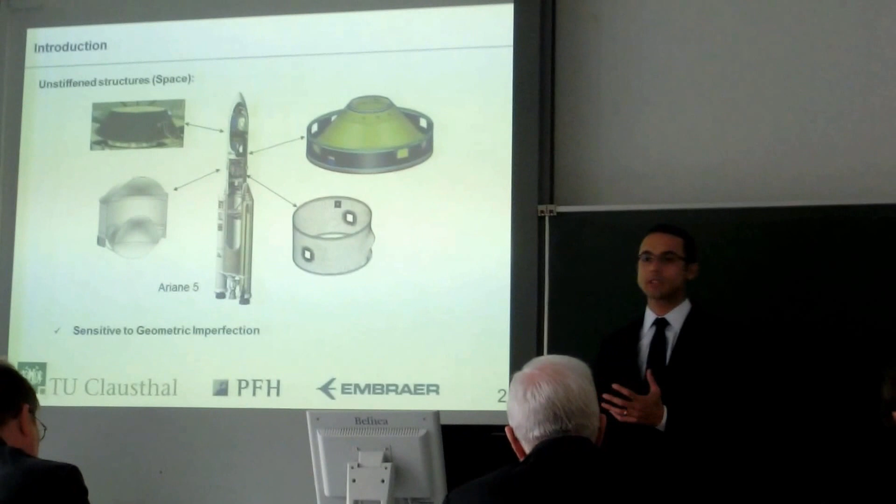These shells have in common one aspect: they are very imperfection sensitive, which means for a small geometric imperfection, the buckling load or the load carrying capacity will be drastically changed. So you have a huge reduction of the load carrying capacity for any small geometric imperfection. When developing models for this type of shell, these models should be able to capture this imperfection sensitivity. So the main focus when developing a semi-analytical model for this type of shell is to be able to capture this imperfection sensitivity.

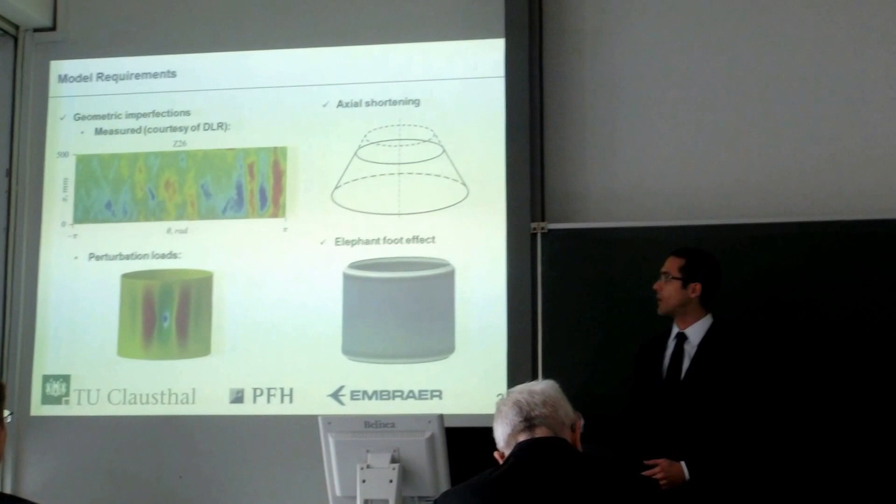This takes us to the model requirements. So what should we be able to consider? First, I already mentioned the geometric imperfections, and here we have an example of a measured geometric pattern given as a courtesy by DLR.

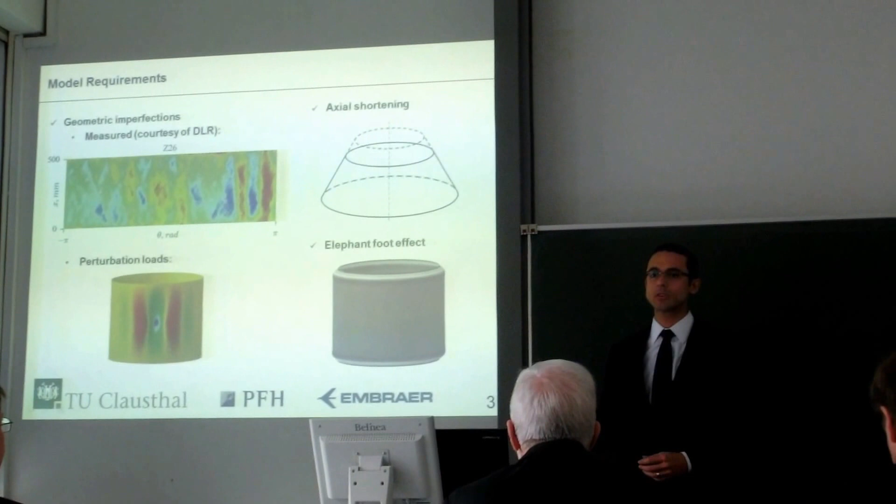Another typical geometric imperfection that we are currently investigating is the one induced by a perturbation load. So we apply a perturbation load, there will be a geometric imperfection pattern, and this also causes a reduction of the load carrying capacity of this structure.

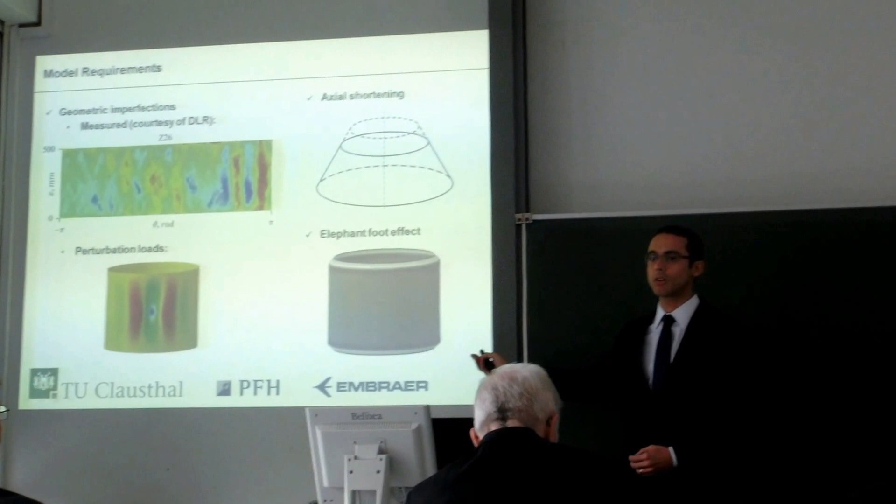Since most of our activities are related to cross-validation of test results, we must be able to take into account the axial shortening that we verify in our testing conditions as well. Another phenomenon that we must be able to capture in these semi-analytical models is the so-called elephant foot effect, which carries this name because of the pattern that we see here.

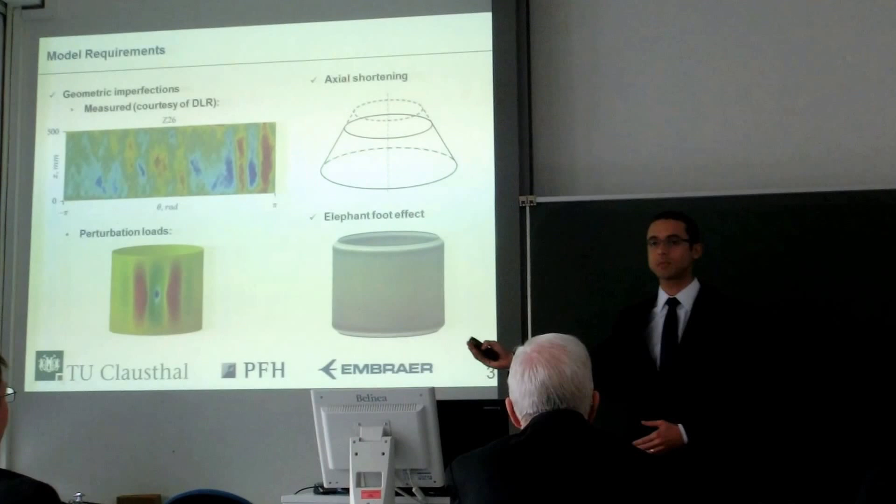This pattern happens because when we apply the axial compression, there will be a radial expansion of the shell, and with the edges constrained for normal displacement, we have a high strain concentration close to the edges, and this becomes an important failure mode that the models must be able to capture. Not only in the space industry, but also this is very much investigated in the civil engineering field.

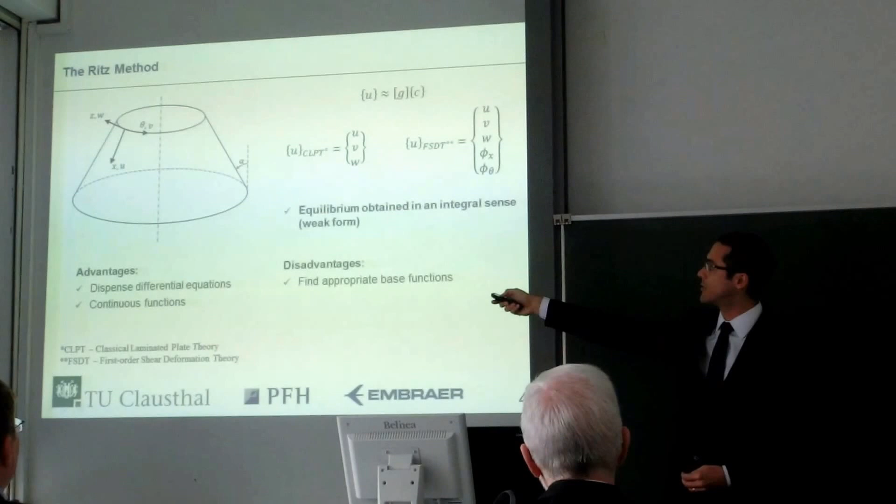One is for the x-axis, we call u. The second one is for the circumferential axis, we call v. And the third one is for the normal axis, we call z. The displacement field variable is w.

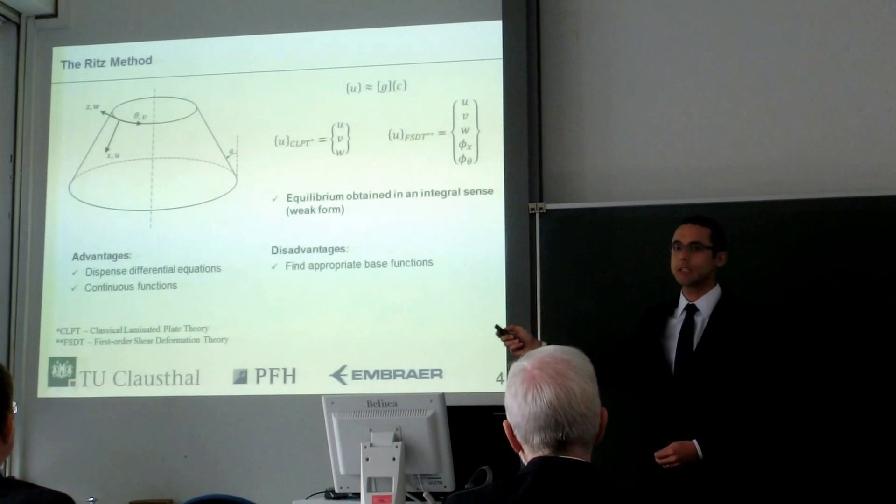When we use the classical laminated plate theory, we can build our displacement field vector as shown here, using the three translational displacement field variables. And when we use the first order shear deformation theory, we have the two rotations of the shell treated as independent variables, so we have two additional independent field variables here.

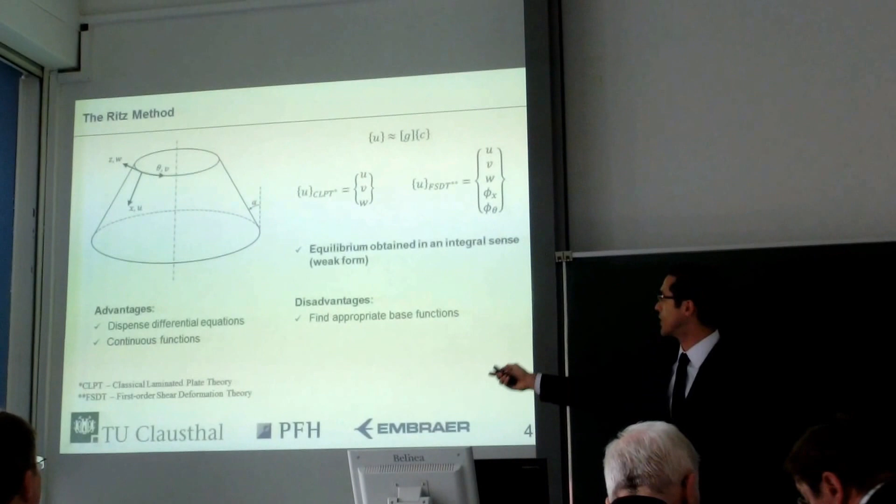When we use the Ritz method, we work directly with the energy functionals, and therefore we obtain the equilibrium equations in an integral form, also usually called the weak form. This means the equilibrium is not achieved at every point in our domain, but in a global sense we guarantee the equilibrium.

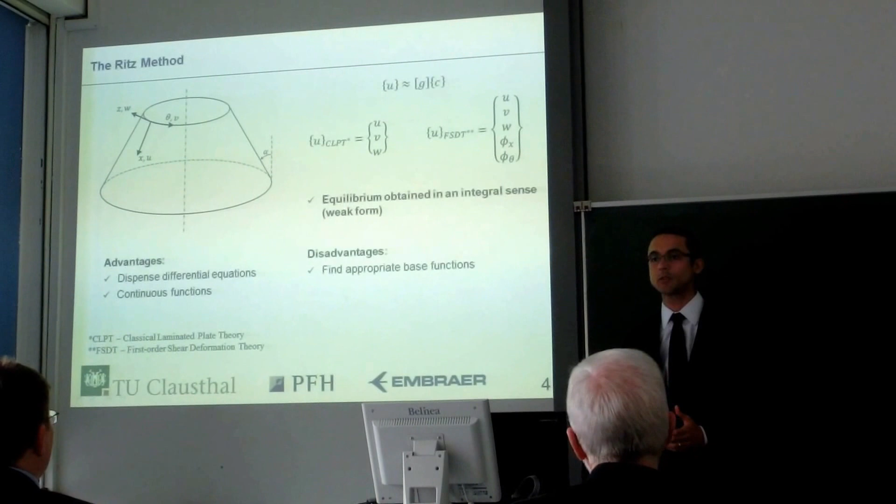Some advantages of the Ritz method. The main advantage, I would say, is that it dispenses with the use of differential equations, so we don't have to work with the governing equations of the system. You can work directly with the energy functionals.

A second advantage is that we obtain at the end a continuous function describing not only the displacement field but also the strain and stress fields all over the domain, and it's very straightforward to obtain strain, stress, and displacement outputs all over the domain.

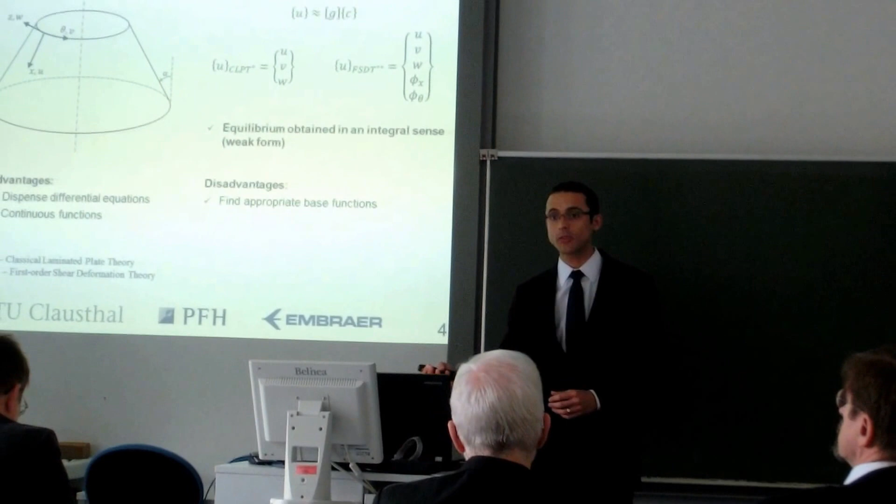But at the same time, having a continuous function, which is one advantage, may become a big disadvantage of the method, because finding the appropriate set of base functions to describe the displacement field all over the domain can be very hard, depending on your boundary conditions and your load cases.

This is what I'm going to detail now: how I decided to separate and find the right set of approximation functions for our problem.

Again, we can approximate the displacement field vector by a matrix containing the base functions, so we know the possible shapes that our displacement may have, but we don't know the amplitudes of these functions building up the full function.

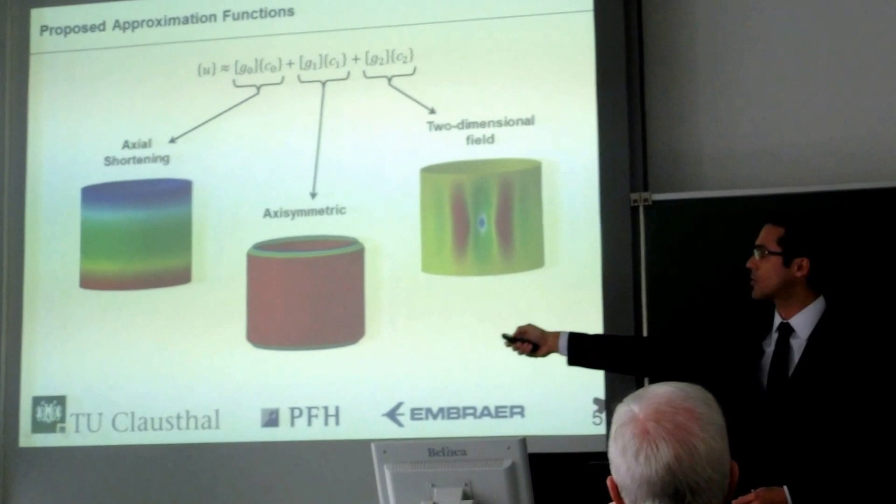I propose to separate the full approximation functions into three parts. The first part was designed to capture the axial shortening of the shell. The second part was designed to capture the axisymmetric component of the displacement field. And the third part was designed to capture the two-dimensional components of the displacement field.

Now I'm going to detail each one of these. The first part is designed to capture the axial shortening.

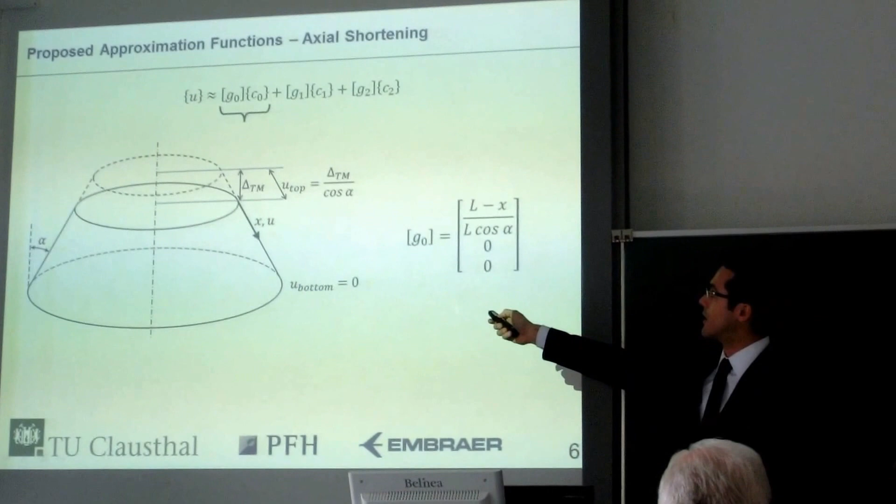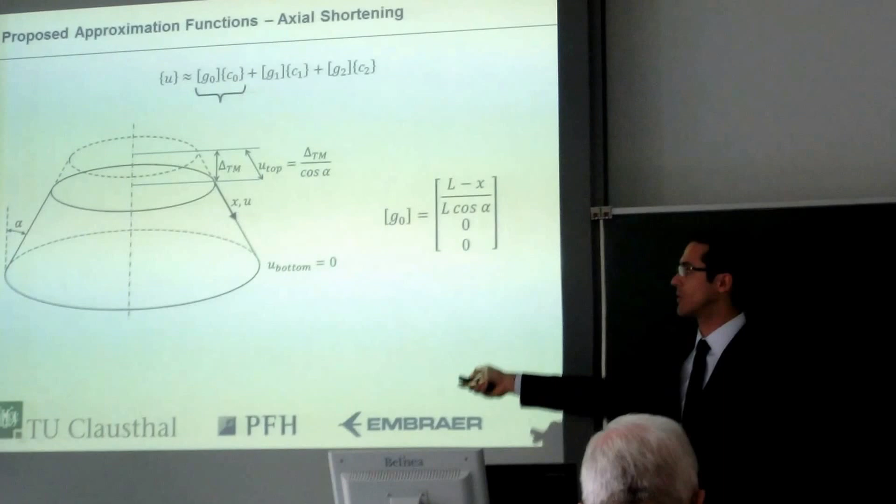When we have the displacement of the testing machine, called delta Tm, we have the displacement of the top edge along the meridional direction described by delta Tm divided by the cosine of the conical semi-vertex angle. At the same time, we have a null displacement at the bottom edge.

I found that using a linear shape function for capturing this axial shortening was already enough, and it gives the same result as a finite element model, as we are going to see in the next slide.

Here is how we build our shape functions for the first part of the approximation field. The first row corresponds to the meridional displacement u, the second row to the circumferential displacement v, and the third row to the normal displacement w.

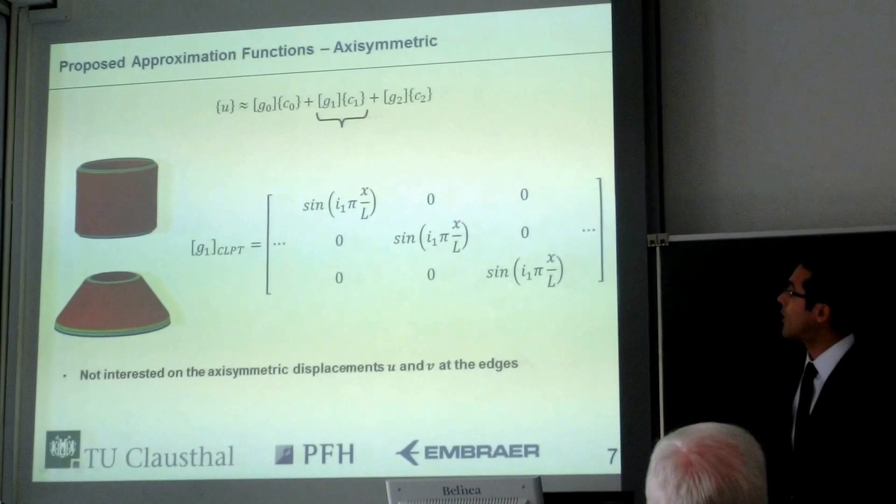Now, moving to the axisymmetric component of the displacement field, it is shown here with one example for a cylindrical shell and another example for a conical shell.

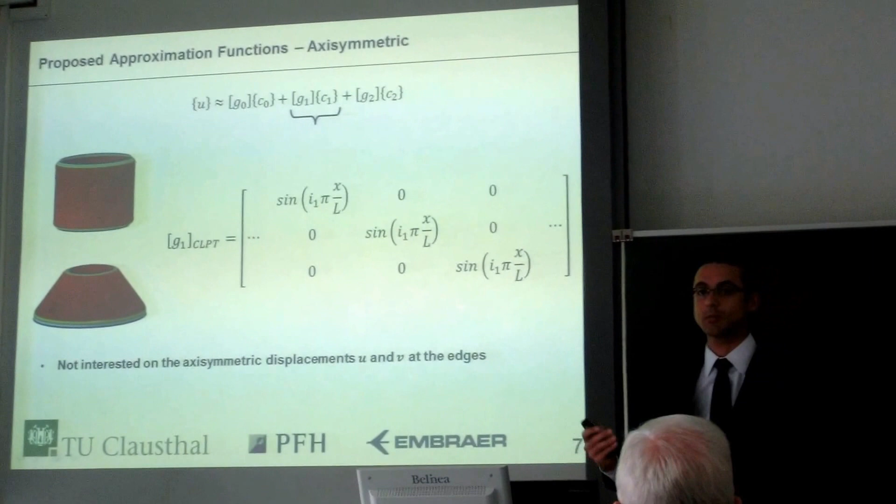I decided to use sine functions to capture this axisymmetric component separately from the two-dimensional component, because sine functions will always give zero displacement at both edges, and I'm not willing to capture any axisymmetric displacement component at the edges. Therefore we can use the sine function, and it's computationally cheap to separate the axisymmetric component from the two-dimensional component.

Now, the last component of our approximation functions can be written in matrix form as shown here. Let's take the third row, which corresponds to the normal displacement, and evaluate this component. We have two components for the normal displacement.

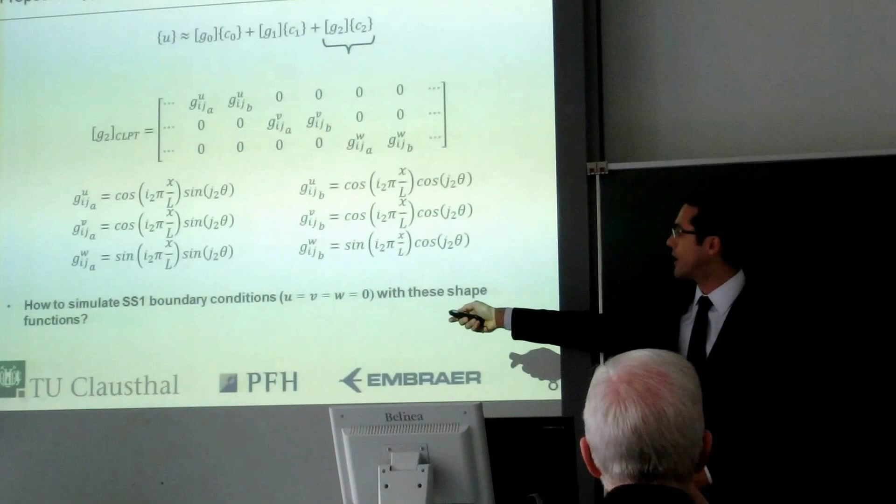The difference between the first and second is that in the first we have a sine function for the circumferential coordinate theta, and in the second we have a cosine function for theta. In this way, we obtain a full Fourier series for the circumferential coordinate, and therefore we are able to capture any displacement pattern that depends on the circumferential coordinate.

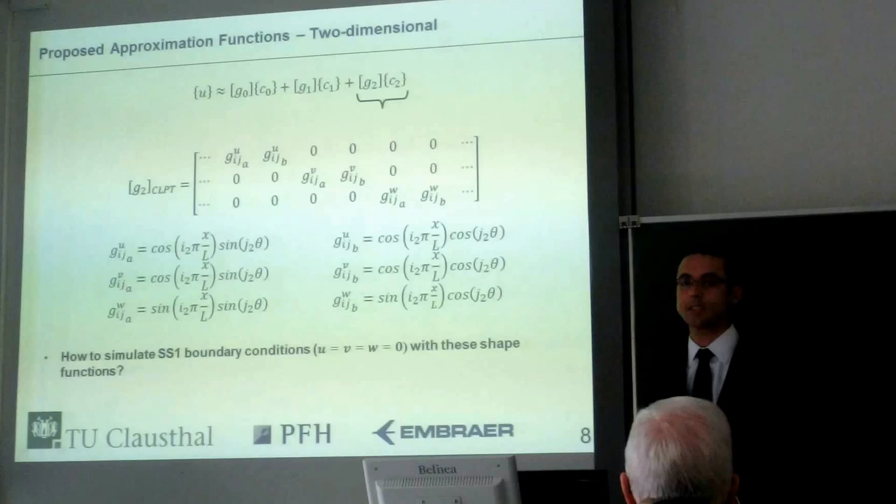On the other hand, for the meridional coordinate x, I only use a sine function because I'm assuming the normal displacement at both edges will be zero, since this condition is very similar to our testing conditions.

For u and v, I'm using cosine functions instead of sine functions to capture the displacement along the meridional coordinate, which means I'm not guaranteeing zero meridional and circumferential displacement at the edges.

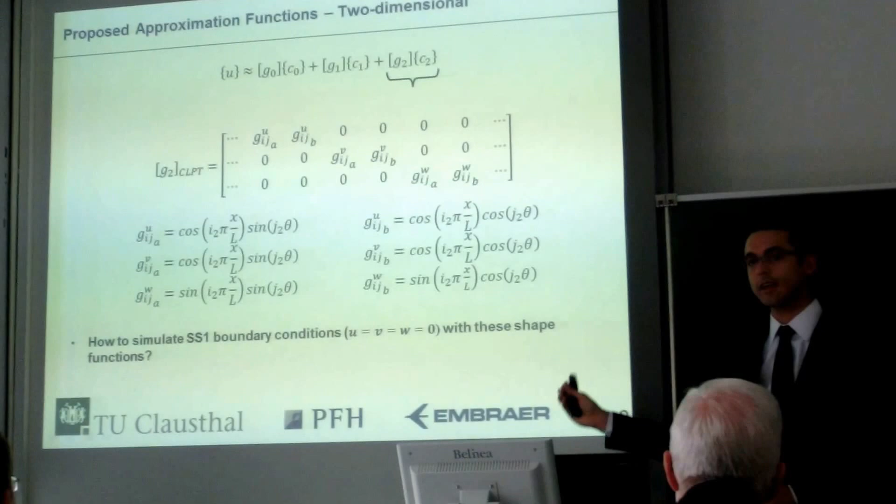So in this way, I'm proposing to use these functions, but how can I use them and at the same time achieve one of the typical boundary conditions—the first type of simply supported condition, where u, v, and w are all zero at the edges? How can I use a cosine function if I want to capture u, v, and w being zero at the edges?

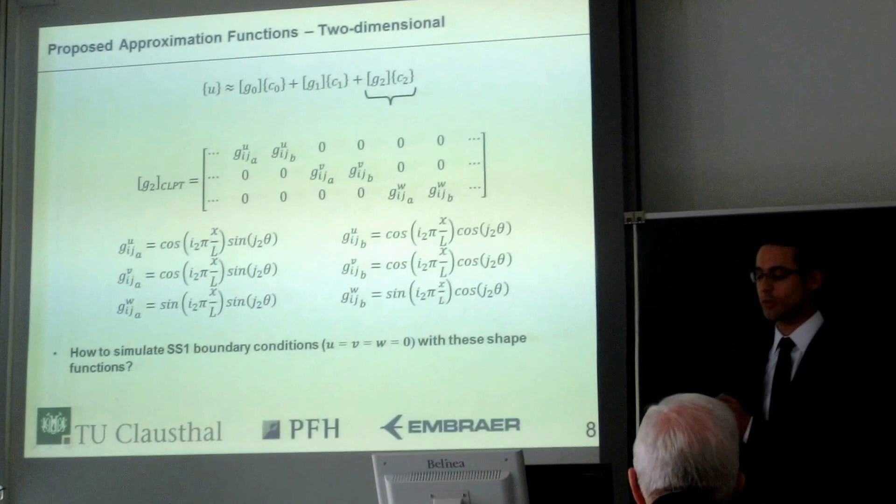So there is a way we found to do it, using elastic constraints to penalize the stiffness matrix in such a way that we change the stiffness of the system just at the edges. This is illustrated here.

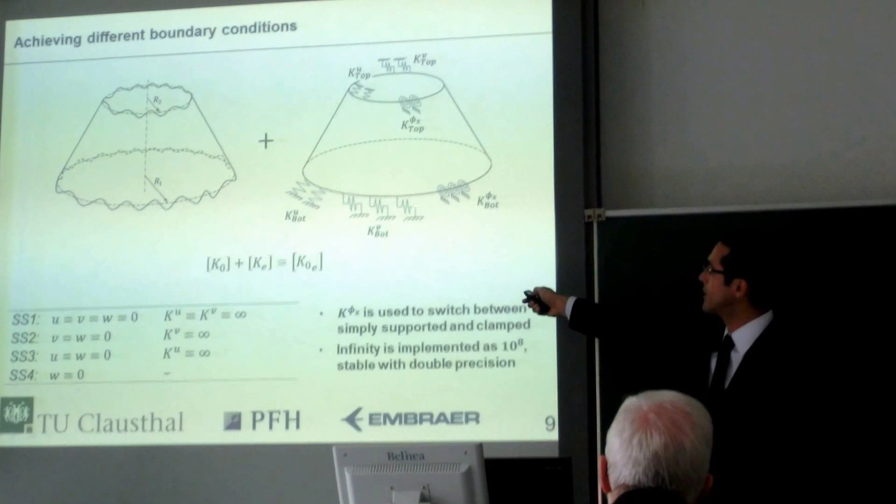Without the distributed constraints, the distributed springs, we would obtain a displacement pattern like this. But if we want to guarantee simple support where displacements at the edges are 0, we can add elastic constraints, represented in matrix form as shown here. So we change the linear stiffness matrix of the system, and in linear static, non-linear static, and linear buckling analysis, we can use this modified linear stiffness matrix.

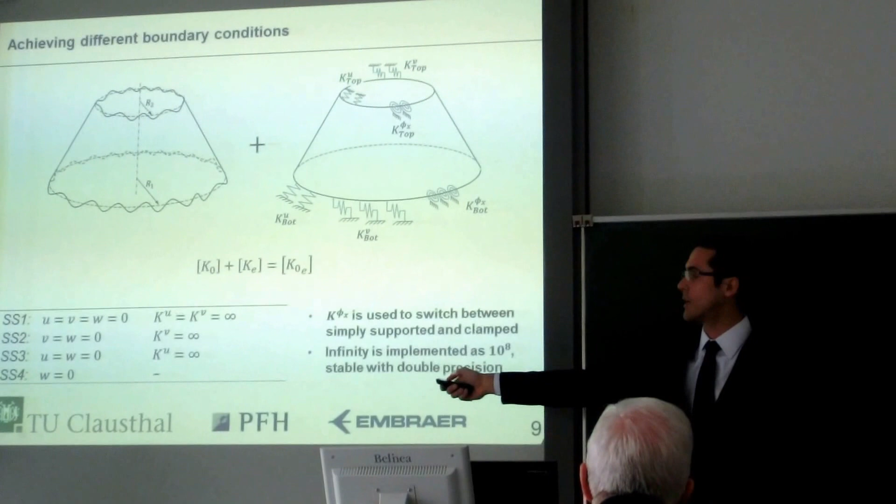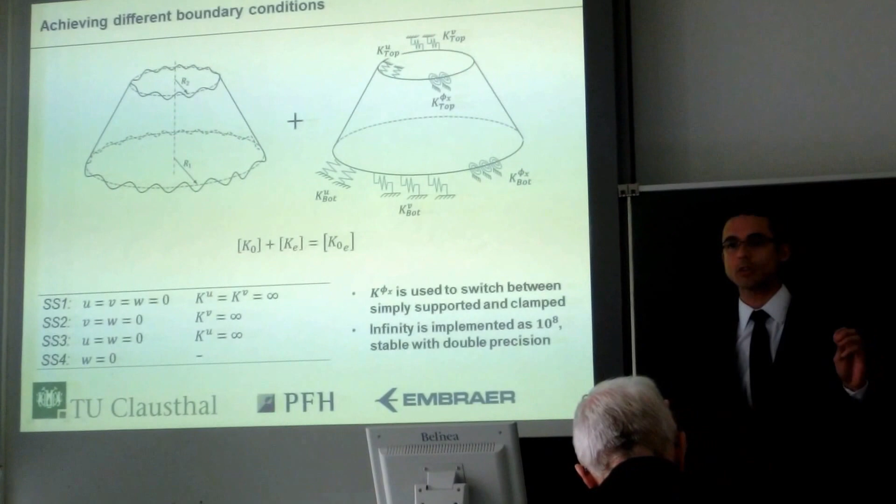Let's give one example. To achieve the first type of simple supported boundary conditions, where the 3 translational displacements are 0, we can set the stiffnesses Ku and Kv to infinity, and this gives the right behavior. If instead of simple supported we wanted clamped or fixed boundary conditions, we should work with the rotational stiffness at the edges. So we can switch between simple supported and clamped boundary conditions by changing the rotational stiffness of the system.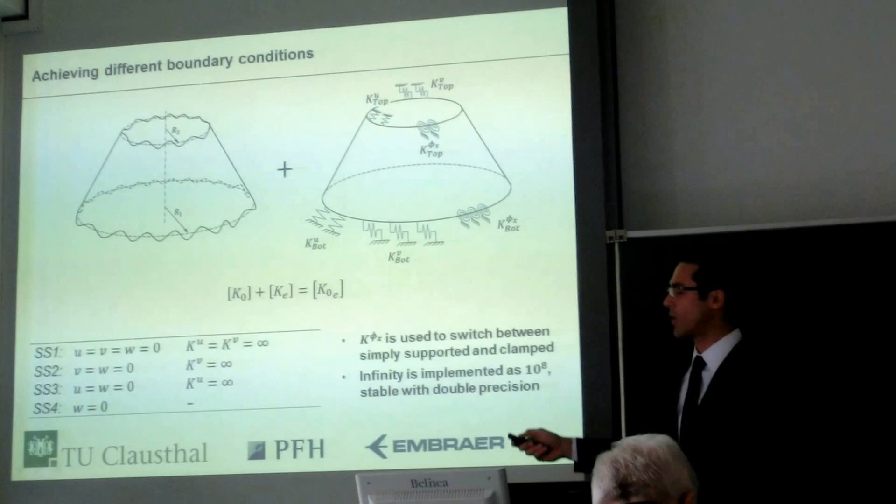In practice, we never use an infinity value; instead we use a numerical value high enough to produce rigid behavior, but not too high to cause numerical instability. In one of our publications, I found that using 10 to the power of 5 Newton per millimeter already produced rigid behavior, though I'm using 10 to the power of 8 in the full implementation with double precision in the code. This showed to be numerically stable and much higher than necessary to produce rigid behavior.

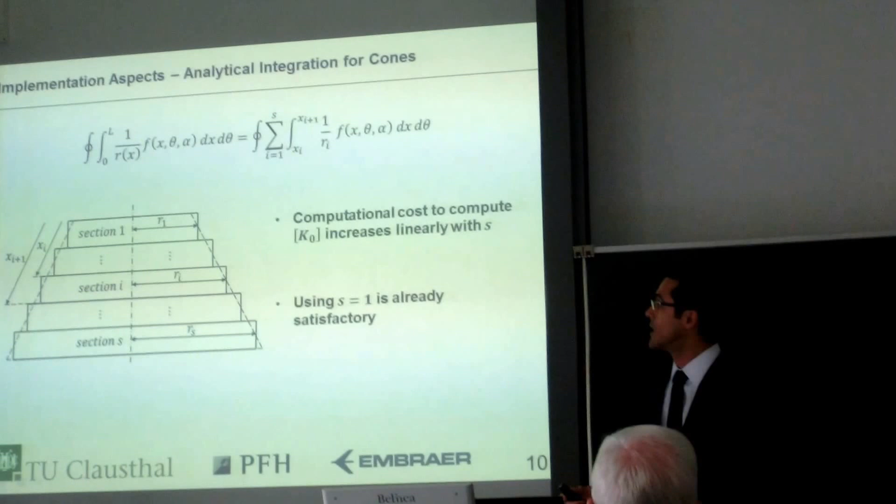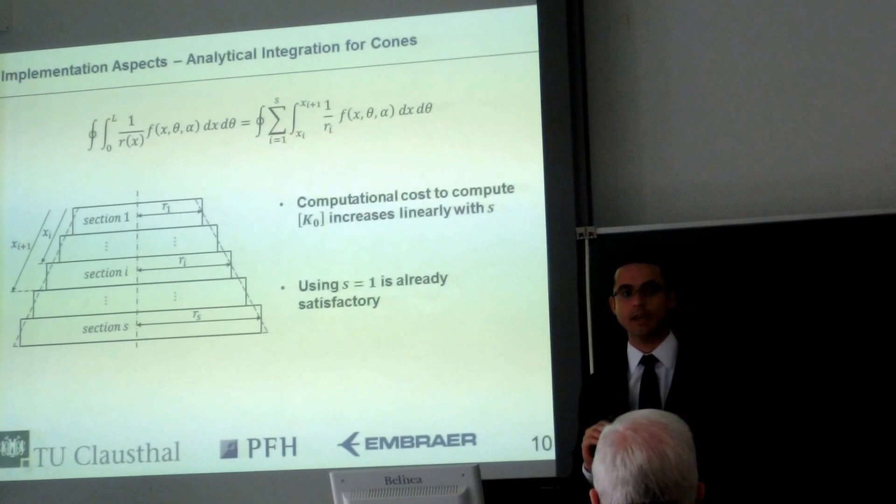Another important implementation aspect was how to integrate the linear stiffness matrices for the conical shells, because conical shells have the radius depending on the meridional coordinate x. Because of this dependency, we run into expressions that are not integrable analytically, so we have to find a way to approximate this.

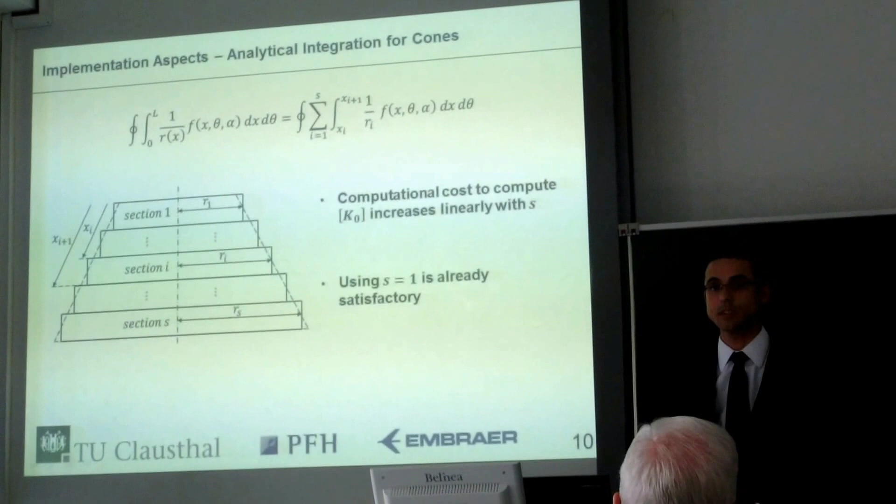One way that showed to be computationally efficient was to divide the integration domain as shown mathematically here, and as illustrated here, where we have different integration sections, each using a constant radius taken from the middle of that section. This way, the computational cost to integrate the linear stiffness matrices for conical shells depends linearly on the number of sections used.

It was interesting that for shells with constant stiffness properties over the domain, we can use only one term, giving a result within an error of 2 to 3%, which is very suitable for optimization tests. So if we need a very quick cycle for the analysis, we can use only one section and the results will be within a reasonable tolerance.

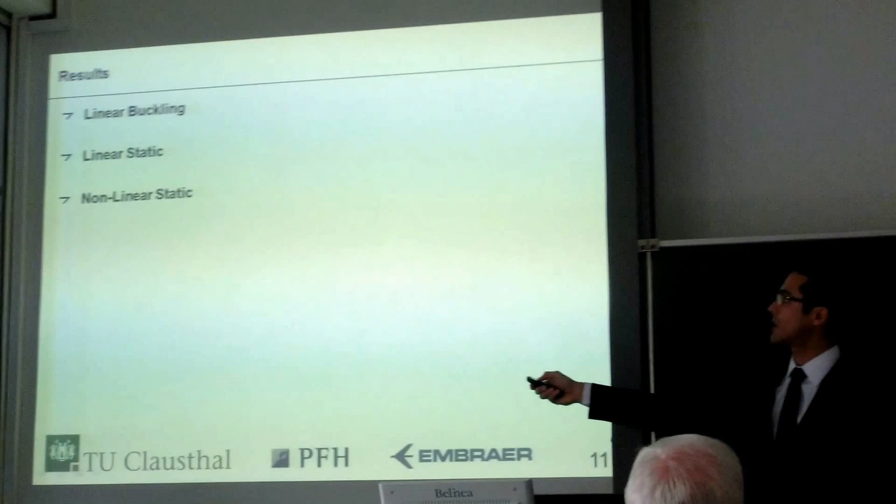And talking about the results, we can already show some of the results for linear buckling, for linear static, and also for nonlinear static analysis.

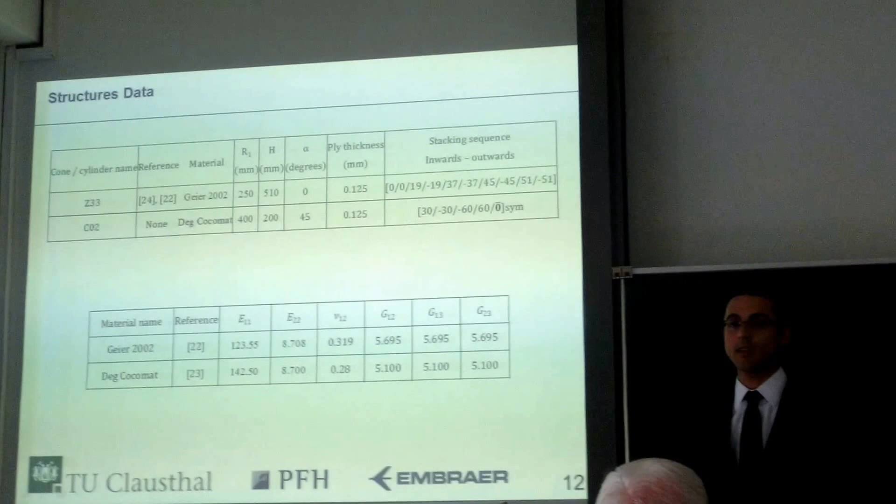Here I'm showing some of the structures that I'm going to discuss. Basically, we have a cylindrical shell which was designed at DLR in 1992 by Dr. Zimmermann. This structure has a special characteristic: a very special laminate, as you see here, designed to generate the highest imperfection sensitivity. This structure has become a benchmark case for testing many different methods, not only by me, but by many authors.

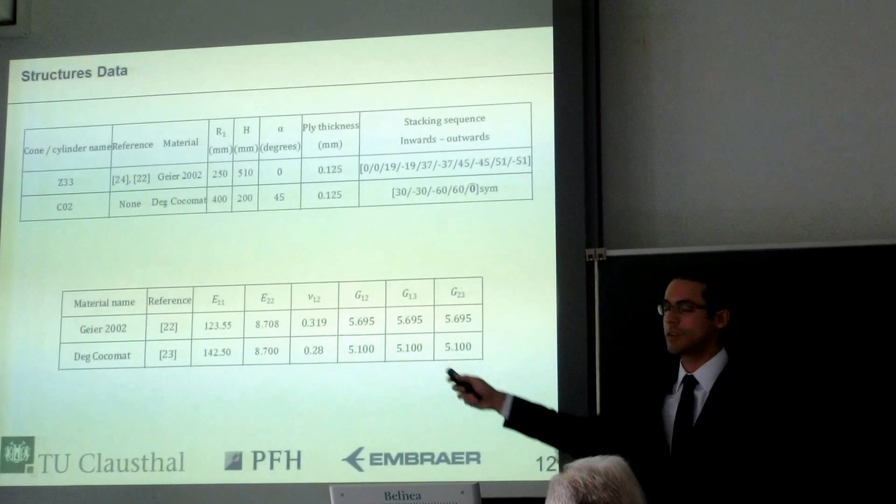I also designed another conical shell, having high imperfection sensitivity, not using an advanced procedure as used by Zimmermann, but just to get high imperfection sensitivity in order to verify the algorithm. The material properties are shown here, and correspond to a usual ply with unidirectional fibers.

In many of our results, you won't see the three-dimensional patterns, but rather open cylinders and open cones. So when you see a rectangle like this, it corresponds to an open cylinder, and when you see a structure like this, it corresponds to an open cone.

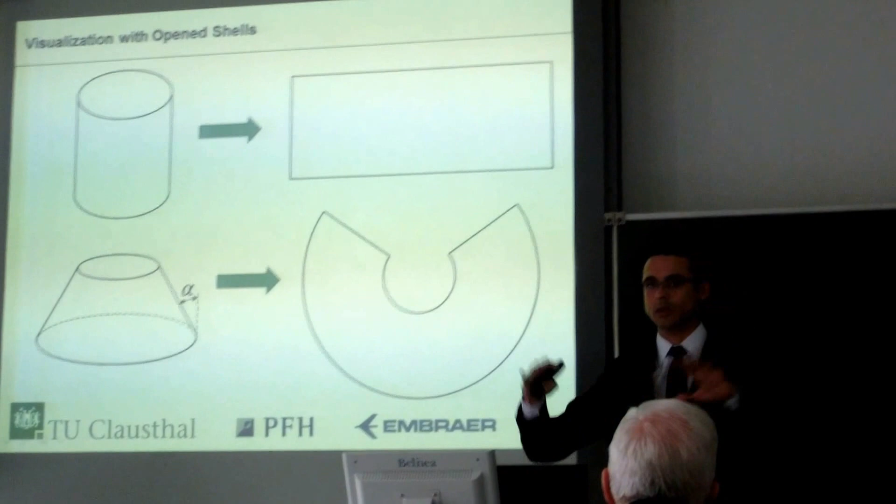Starting with the linear buckling results for cylinder Z33, we see the convergence of the first linear buckling mode, where by increasing the number of terms in our approximation functions using the Ritz method, it quickly approaches the pattern obtained using finite elements. This is also illustrated in this graph, where we see the linear buckling mode approaching the finite element result by increasing the number of terms.

In this case, using both the classical laminated plate theory and the first order shear deformation theory, we approach the same result. But for thicker shells, I would expect the classical theory to give a higher buckling load than the first order shear deformation theory.

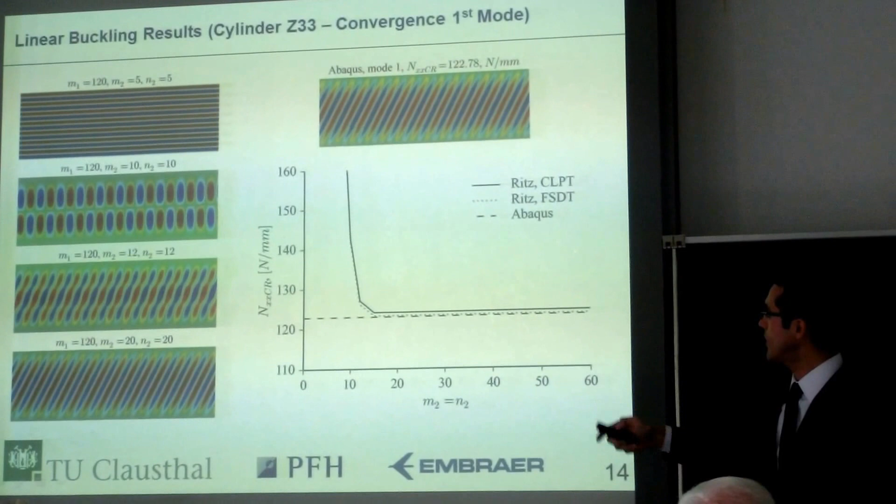This slide shows the comparison not only for the first buckling mode, but for higher buckling modes, up to the 9th buckling mode. We see a very good correlation using the classical laminated plate theory, the first order shear deformation theory, or finite elements.

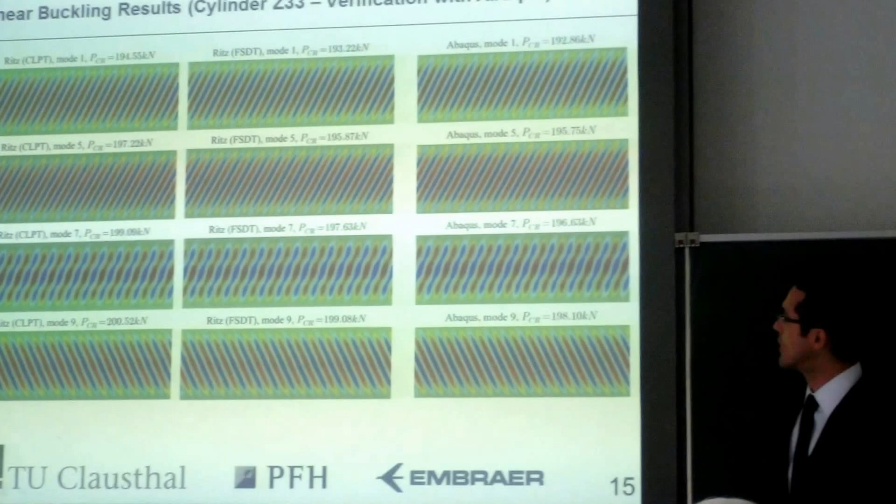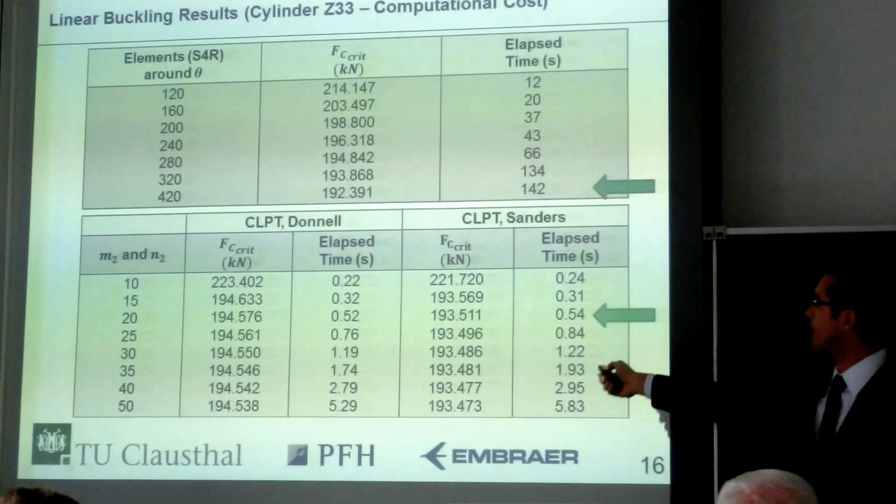Now an important comparison is the computational efficiency of this method compared to finite elements. Using Abaqus with the element type S4R, which has reduced integration for calculating the stiffness matrices, it converges with about 420 elements around the circumference, and using this mesh takes about 142 seconds. In the Ritz method, for linear buckling analysis, it converges with about 20 terms and takes about 0.54 seconds. So in this case, it's about 250 times faster.

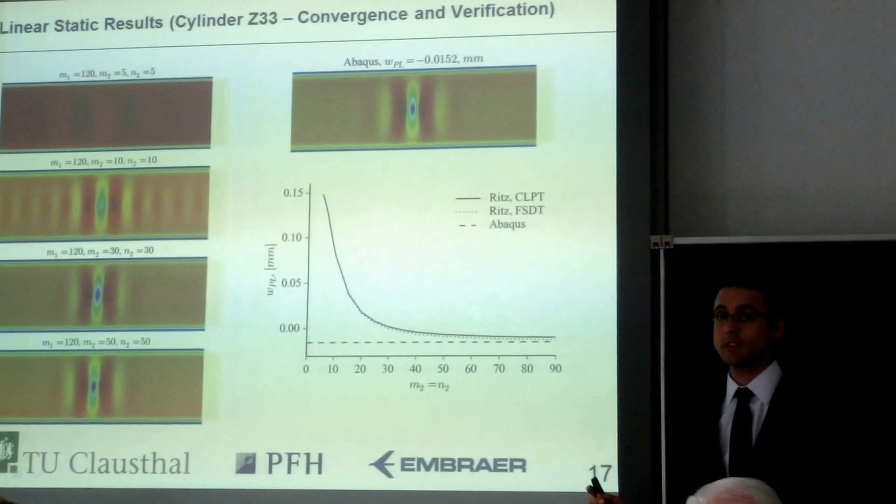Moving from linear buckling analysis to linear static analysis, here is the convergence result using the cylinder Z33, with an imperfection caused by a perturbation load, and applying axial compression. Increasing the number of terms, we approach the result from the finite element code. This is illustrated by measuring the normal displacement at the point where I apply the perturbation load, and how this displacement changes by increasing the number of terms. Again, we get a good convergence.

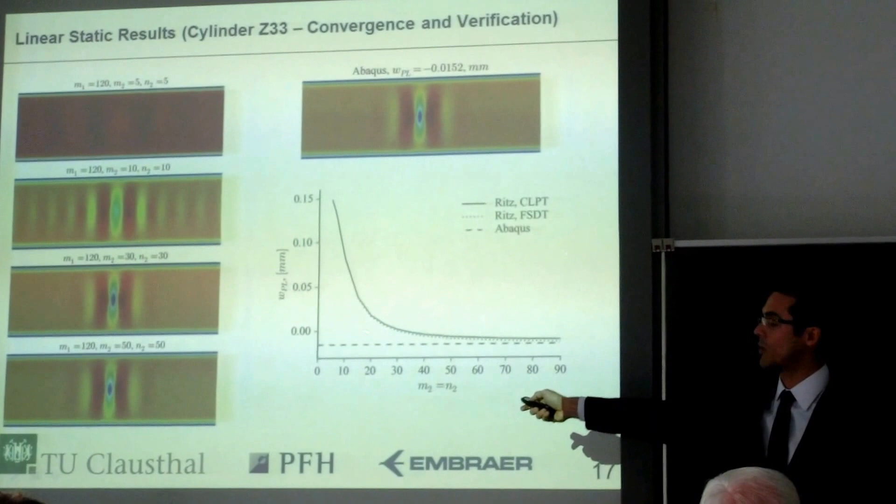In this case, convergence is not obtained with 20 terms, but with about 50 terms for a tolerance of 2%. This is because when we apply a perturbation load like this, we have high frequency harmonic functions, so we need more terms to achieve this high frequency.

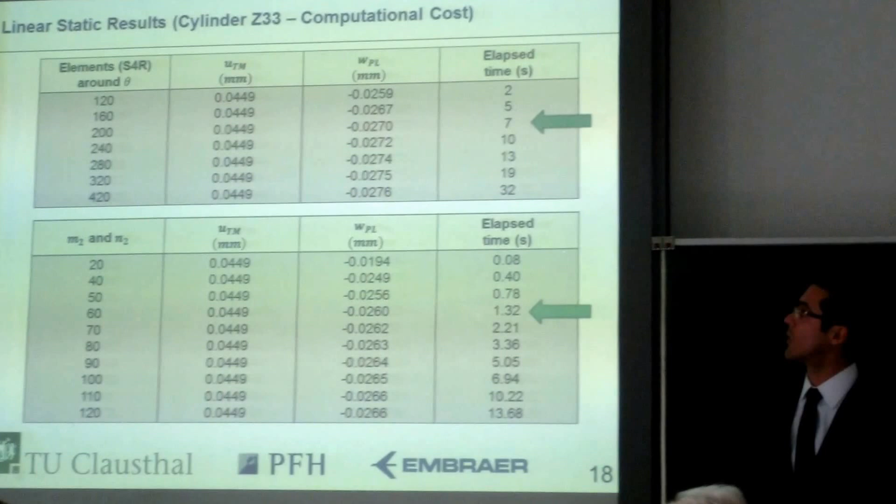Now let's show a computational comparison for linear static analysis. The finite element code converges here with only 200 elements around the circumference, and it takes about 7 seconds to run. With the Ritz method, converging with about 60 terms, it takes 1.32 seconds, and is about 5 times faster.

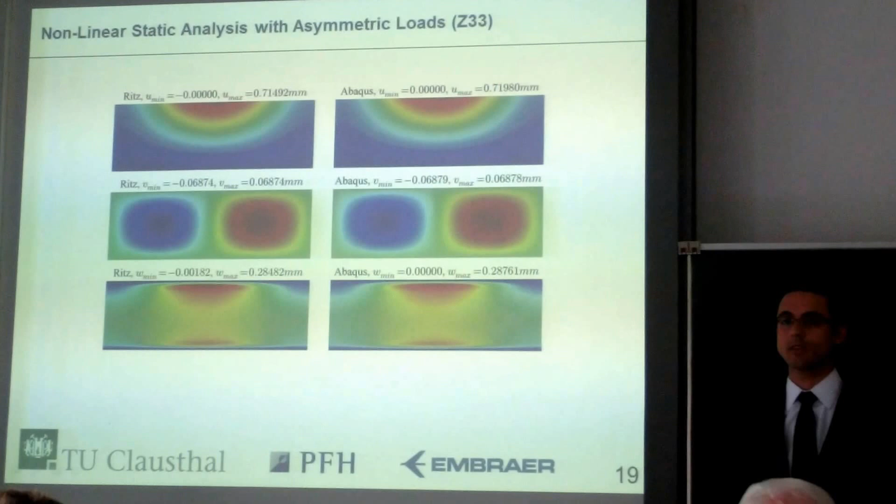Another very important load case that we must be able to simulate in our models is when we load the structure with non-symmetric loads. Instead of loading the structure uniformly, we are applying, in this case, a sinusoidal function for the axial load.

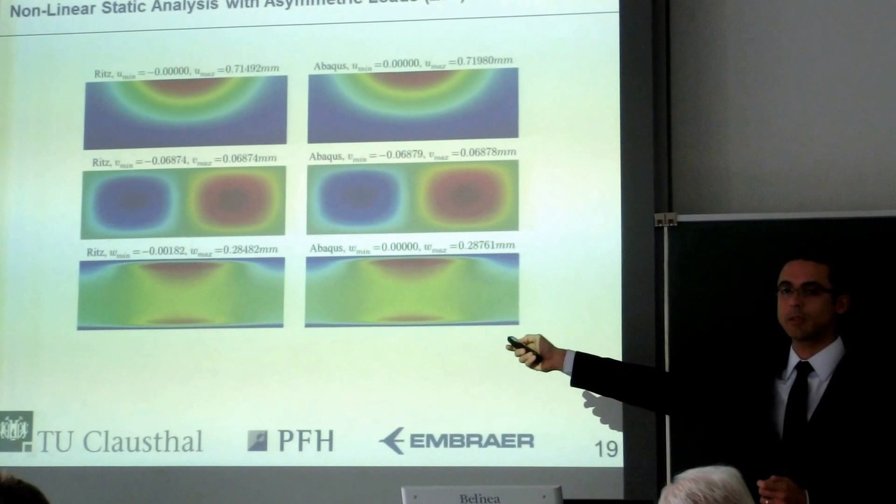This is the result that we obtain using the Ritz method. Here we see the displacement pattern over the meridian, here is the circumferential displacement field, and here is the normal displacement field. We see again that the Ritz method approaches the finite element result very well, not only in the patterns, but also in the minimum and maximum values.

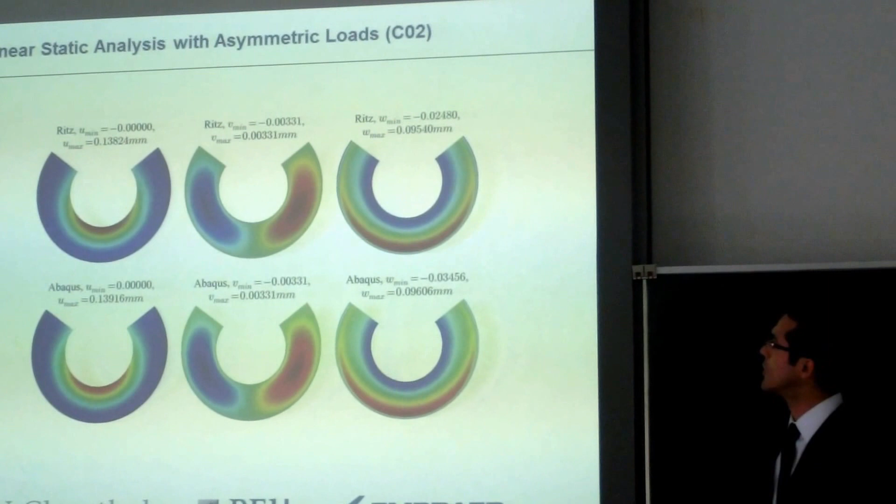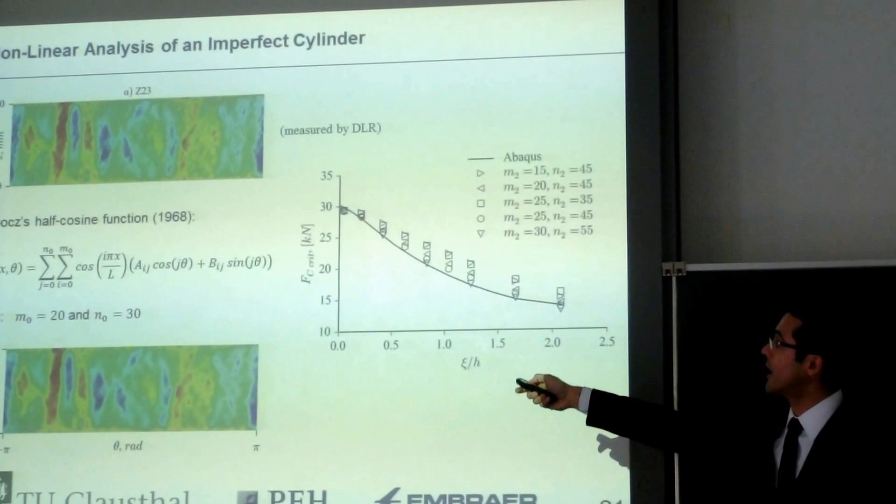The last nonlinear results I would like to show is for imperfect shells. The first set of results shows an imperfect shell carrying imperfection from a measurement system. In this case, we have the original imperfection from the ATOS system measured by DLR. In order to apply this imperfection into the Ritz model, we need a continuous function.

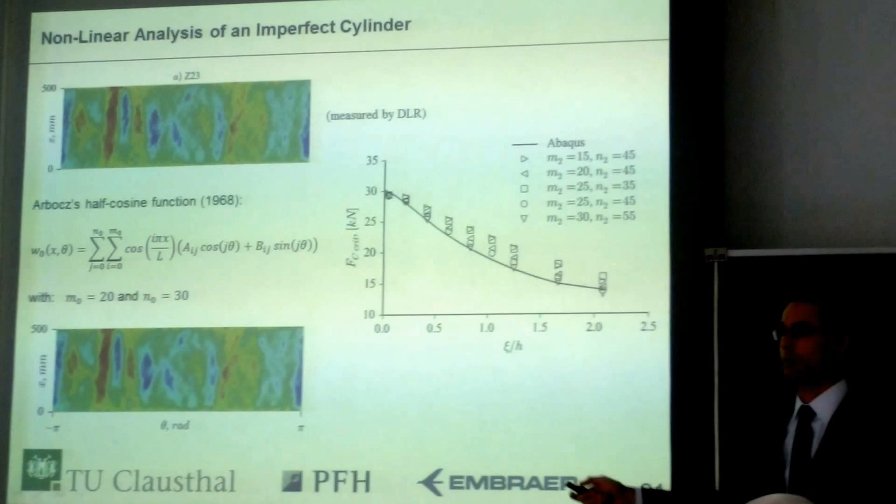We can use the continuous function given by Arbocz in 1968, called the half cosine function, and fit this function to the measured imperfection for a given precision, then use it in the Ritz method. I'm using here precision of 20 m0 and 30 n0, and this is how the continuous imperfection field looks. It correlates very well with the measured imperfection field.

When we apply this to both the finite element model and the Ritz model, we obtain these results, where the continuous line shows the finite element result, and the dots show results using the Ritz method with different accuracies. We can see that the Ritz method converges to the finite element result by increasing the number of terms. This is as expected, and we were very happy with these results.

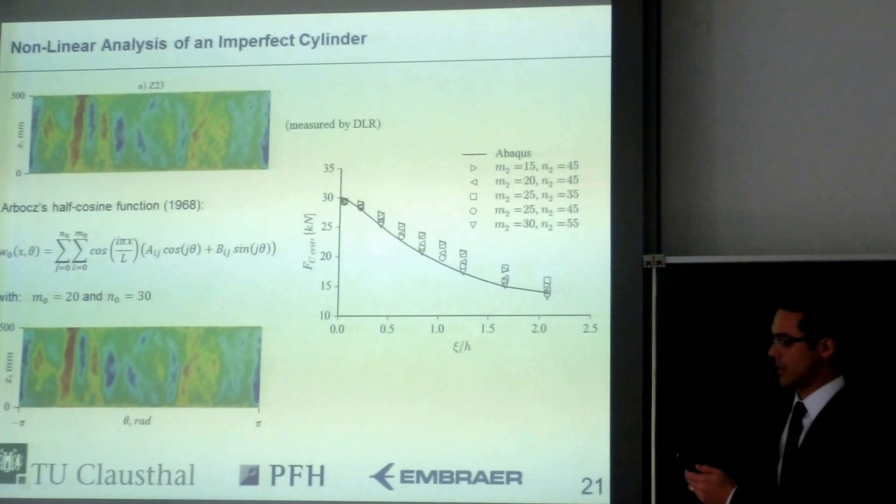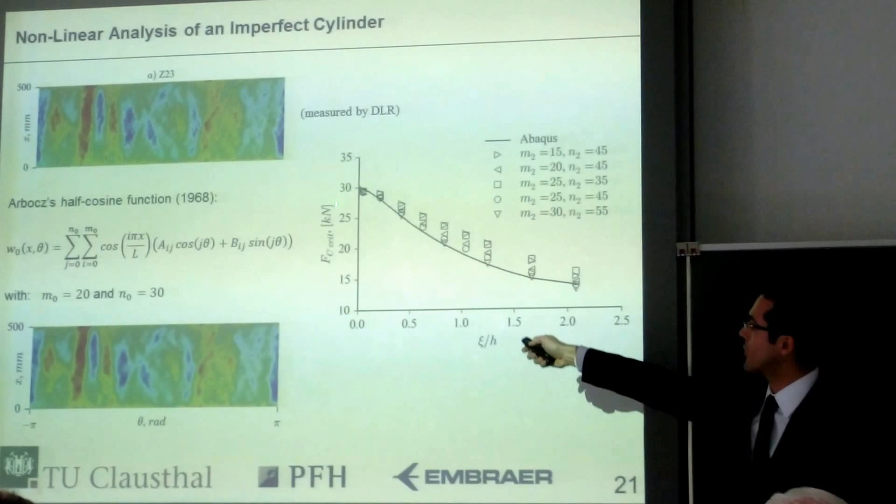In the previous slide, I'm measuring the buckling load for different imperfection amplitudes. So I increase the imperfection amplitude by scaling it up and down, and then measure how this affects the load carrying capacity of the structure.

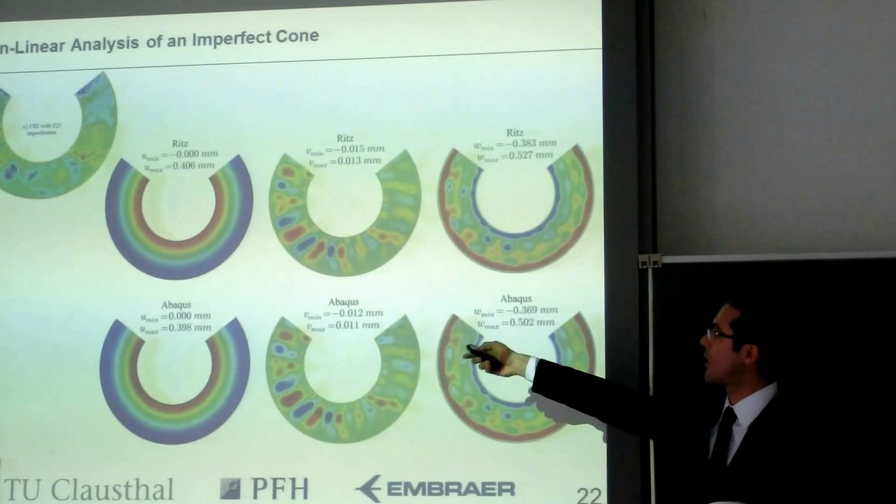We already saw that the correlation for buckling load was good, and now I wanted to see if the displacement pattern correlates well for both the Ritz model and the finite element result. I'm stopping the buckling test at the onset of buckling, and for both the finite element code and the Ritz model I take a picture of the three translational displacement fields. For the Ritz method it's shown here, and for Abaqus it's shown here. We see that they not only look like each other qualitatively, but also quantitatively.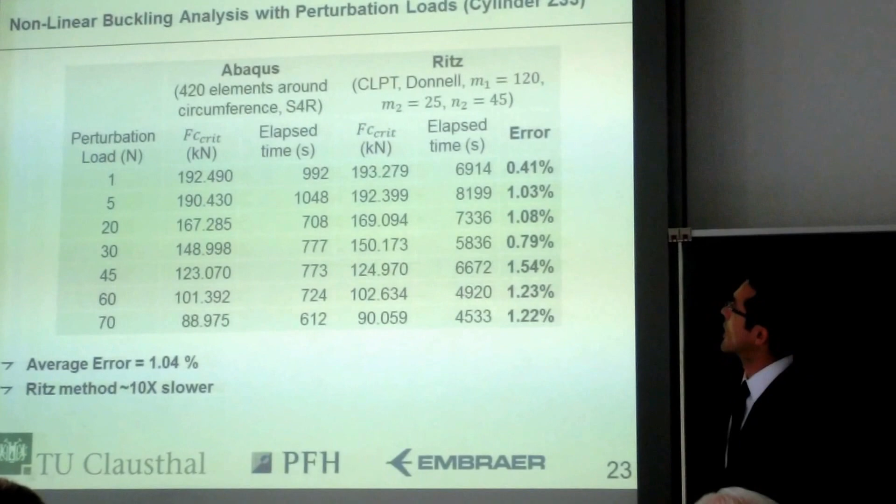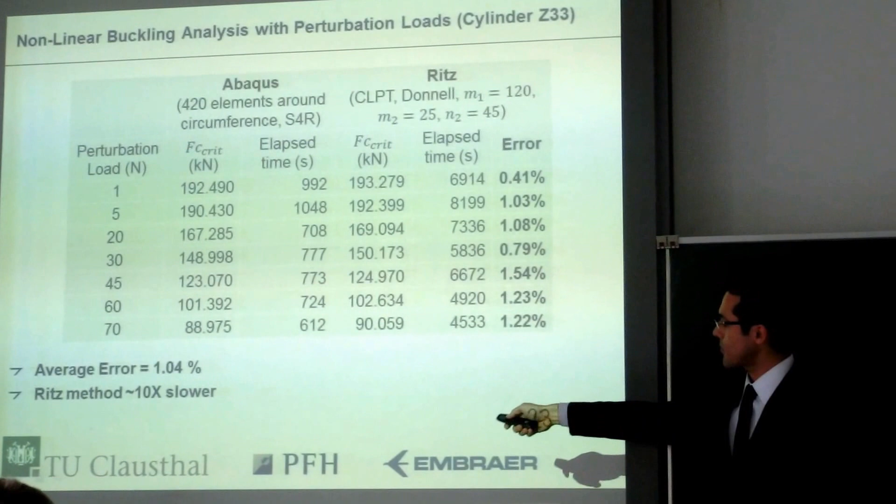We see here that the buckling load is very well predicted by the Ritz model, and on average we have an error of 1.04%. But the Ritz method has a drawback here, which is it's about 10 times slower. Now you may be curious why, for nonlinear analysis, the Ritz method was so much slower than finite elements. I'm going to discuss this in the concluding slides.

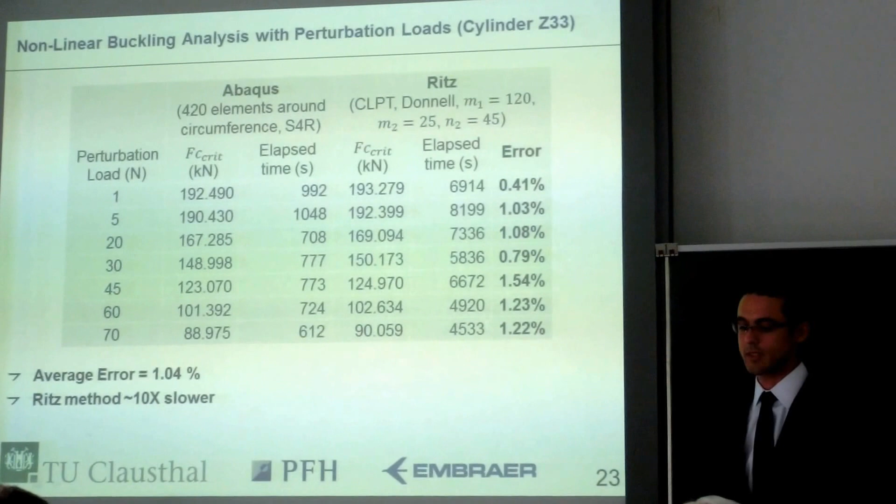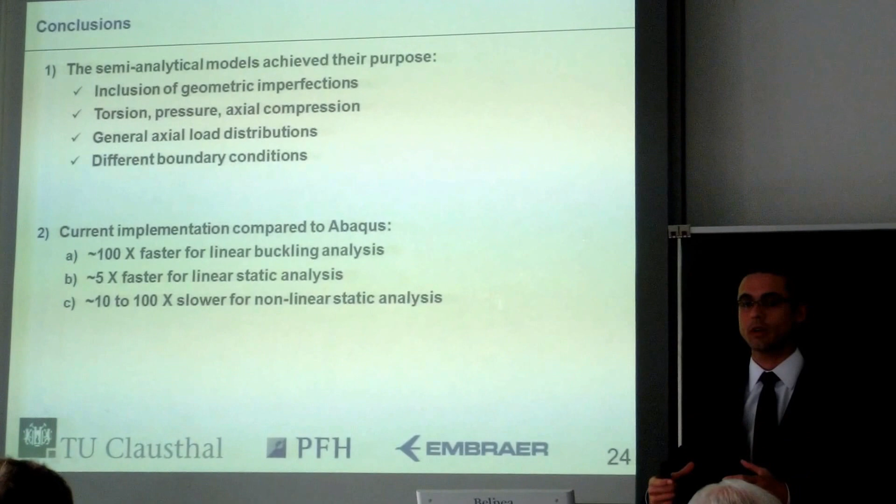Going to the conclusions, the first is that the semi-analytical methods achieved their purpose. They were able to capture the geometric imperfection sensitivity of the structures. They were able to capture combined load cases too, which I'm not showing here due to time constraints, but you can find them in the publications we wrote. It can be used for general axial load distributions, not only uniform axial loads, but also any general load applied to the structure, and also for different boundary conditions.

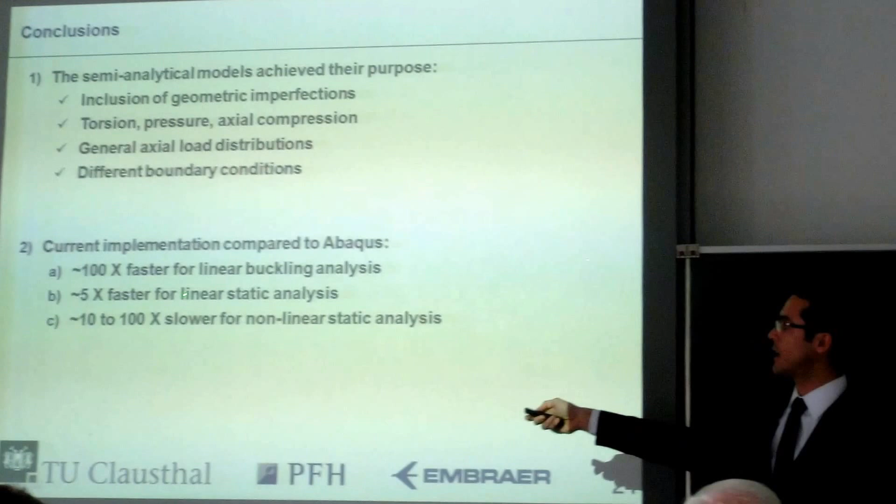Talking about the computational comparisons, in the current implementation it's about 2 orders of magnitude faster for linear buckling analysis, about 5 times faster for linear static analysis, but it can be 1 to 2 orders of magnitude slower for nonlinear static analysis.

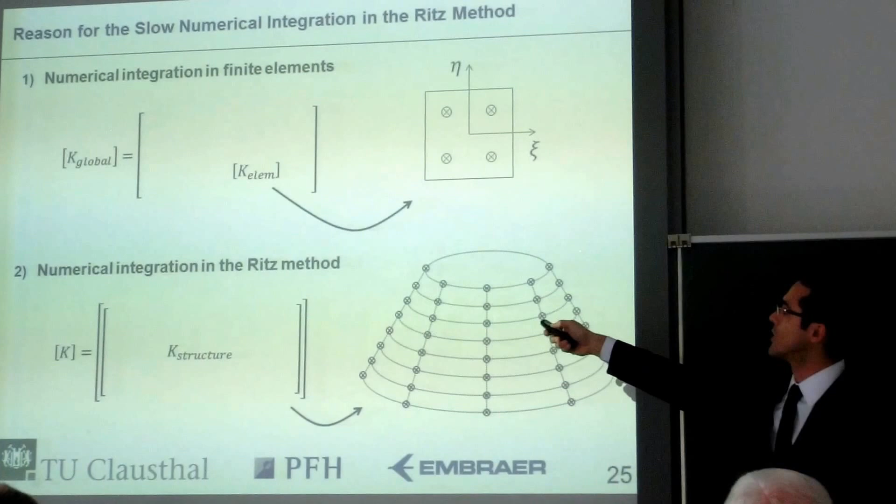Now let's go into why it's slower. When we numerically integrate the stiffness matrices of this system, we sample integration points where we evaluate the stiffness matrix. In finite elements, for each integration point, you only have to evaluate a small region of the stiffness matrix, corresponding to the degrees of freedom affecting that integration point.

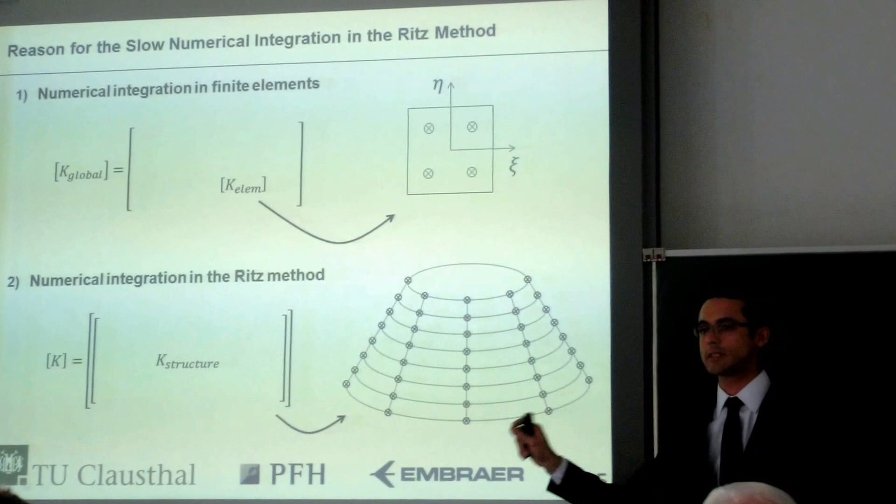Instead, in the Ritz method, since the degrees of freedom are the amplitudes of the approximation functions, for each integration point the full stiffness matrix is influenced, and therefore we have to calculate the entire stiffness matrix at each point. Whereas in the finite element model, we only calculate a small part of the stiffness matrix. From this observation, I can say that using numerical integration, the Ritz method will always be slower than finite elements.

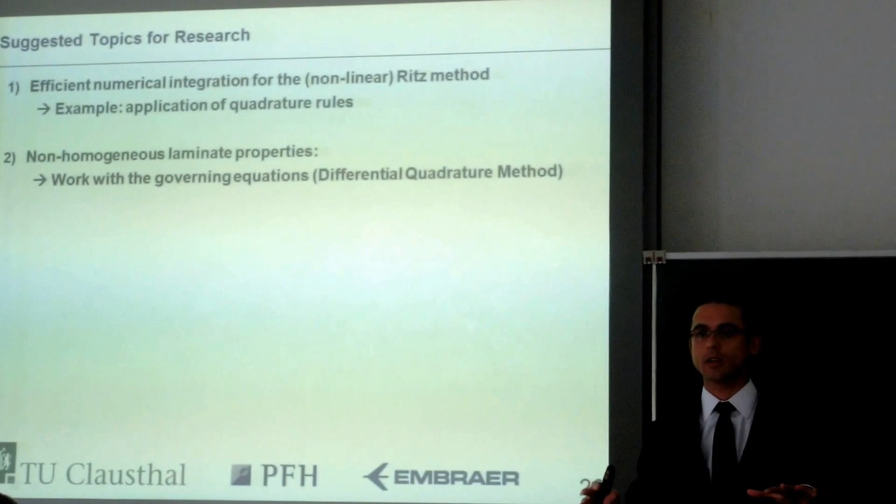Now, the suggested topics for research. In my case, I'm using a uniform grid for the numerical integration of the nonlinear stiffness matrices, but there are quadrature rules that could drastically improve this numerical integration, and this is one topic for investigation.

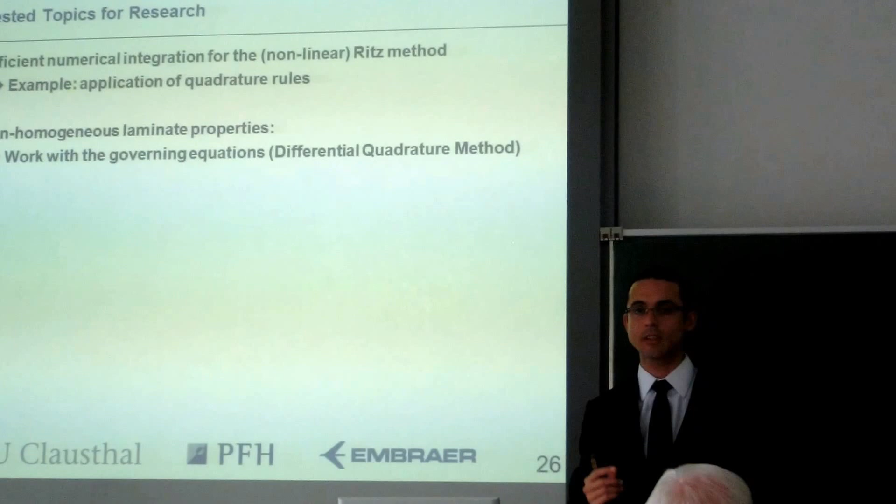Another topic is that if we use non-homogeneous laminate properties, it's no longer possible to integrate the stiffness matrices analytically, and therefore numerical integration is definitely needed for the Ritz method, even for linear analysis. In this way the Ritz method would probably become too hard to handle or non-competitive to use. I think one very promising method for this purpose is the differential quadrature method, where you work directly with the governing differential equations.

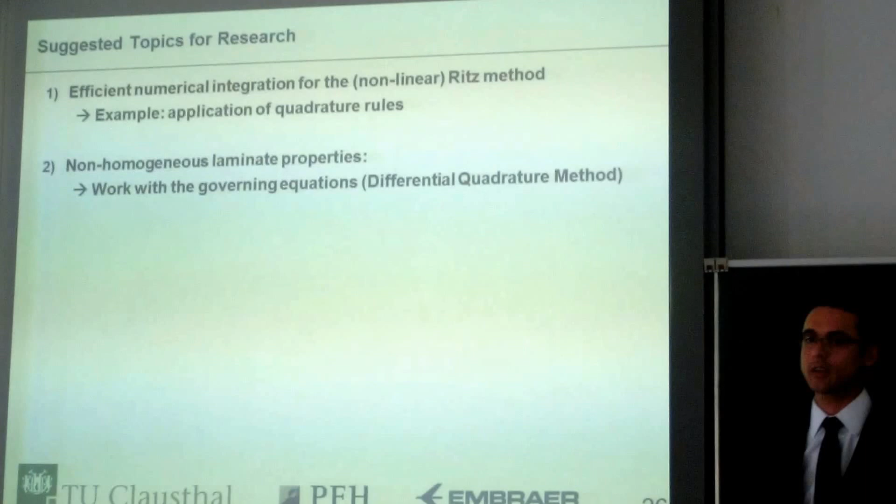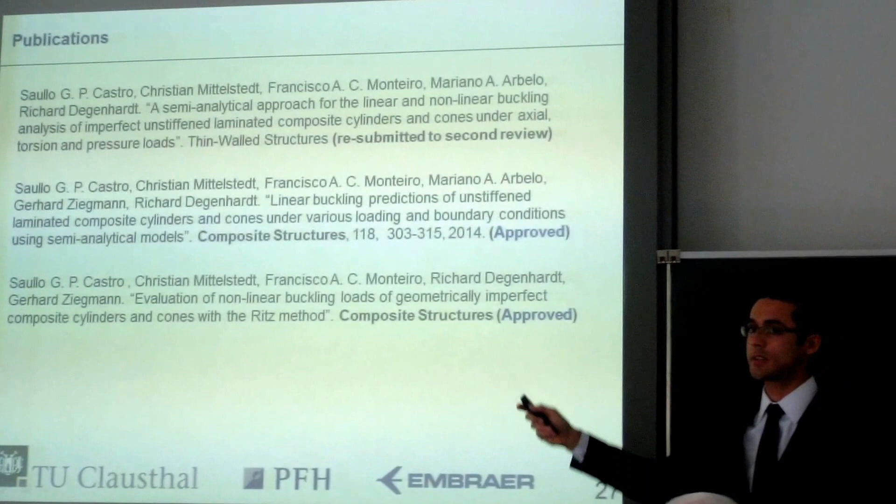These are the publications related to this thesis. The first was submitted to the Thin Walled Structures journal in April and is now in its second review. The second, written for Composite Structures, is about linear buckling analysis, and this was approved. The third, also for Composite Structures, uses the nonlinear method proposed here for imperfect shells, and this was also approved. Everything developed is available online.